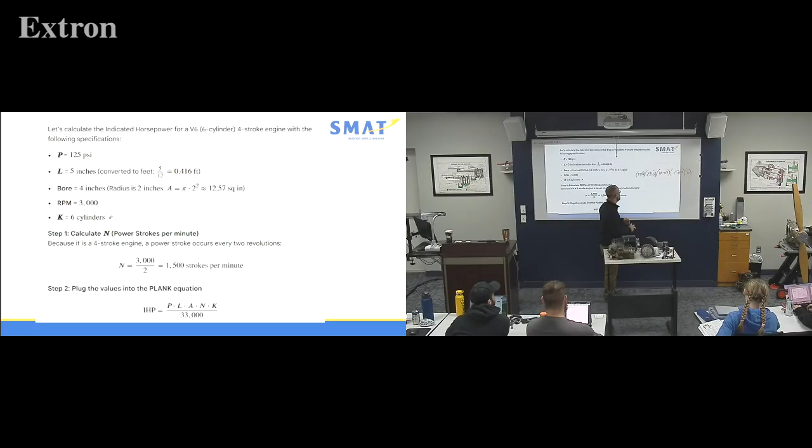Ryan, serious question: do you happen to know when they were measuring how much the horse could do, the 33-pound weight, he or she, could have been either one, the horse. How did they trot it, 1,000 linear feet? Did they go in a circle? The 33-pound weight was just for my mind to understand, because I didn't want to talk about sacks of barley. So it could have been like 100 feet. I was picturing a horse lifting a 33-pound weight 1,000 feet in 1 minute. That's pretty incredible. Giddy up, okay.

All right, can somebody do the math for me? I've done it, but can you do the math for me? 178.265454. What is that, big boss? What is it? IHP, indicated horsepower. All right, 178 horsepower.

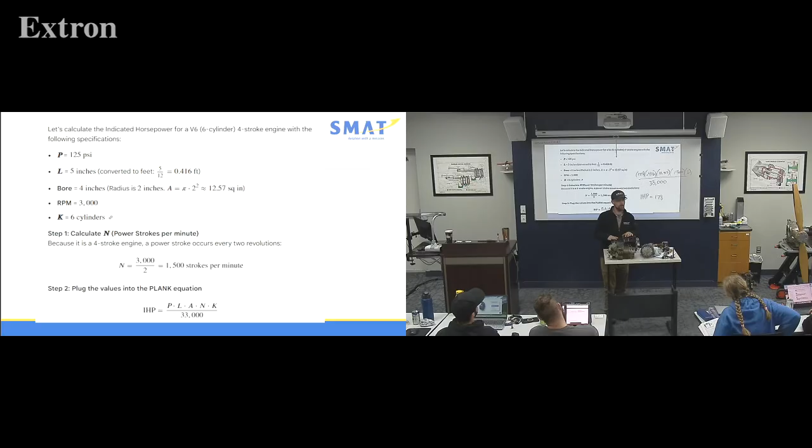Okay, proper timing. And anybody remember the word VE? What is VE? VE... volume. What? Volumetric efficiency. Oh, I know, we heard this. Was that on Monday? Maybe Monday. All right, what was volumetric efficiency? What is volumetric efficiency?

Ability. Go ahead, Marcy. Come on, Joe, add to it then. Volumetric efficiency is the ability of a cylinder to take in, suck, squeeze, bang, and then push it back out. Okay, if a cylinder cannot do that, for example, too weak of a spring.

You guys ever measured spring tension, valve spring tension? Okay, what was the purpose of that besides busy work? It was not busy work. If a spring is not strong enough, it will not close the valve, there's a purpose in it. If it's too low, the valve's going to open too much. If it's too tight, the valve's not going to open enough. What happens if the gap is too much between the push rod and the rocker arm?

If the gap is too much, it won't open enough. What if it's too tight? If it's too tight, the valve may not close, or it may open too long.

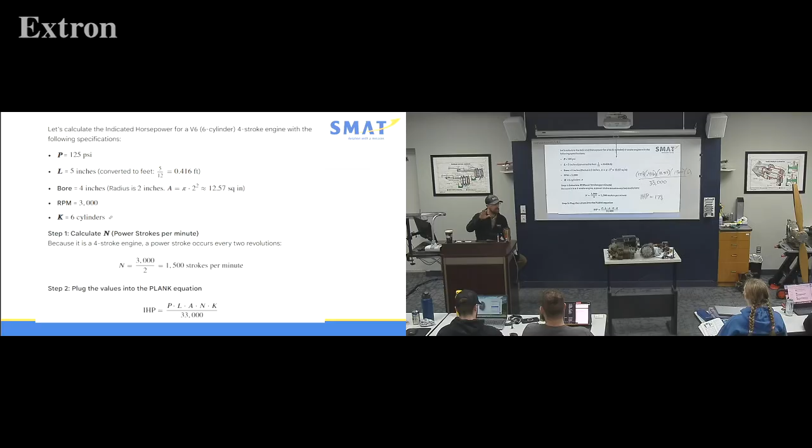All right, everybody good? Any other questions, comments? Hey, you're really real now. Okay.

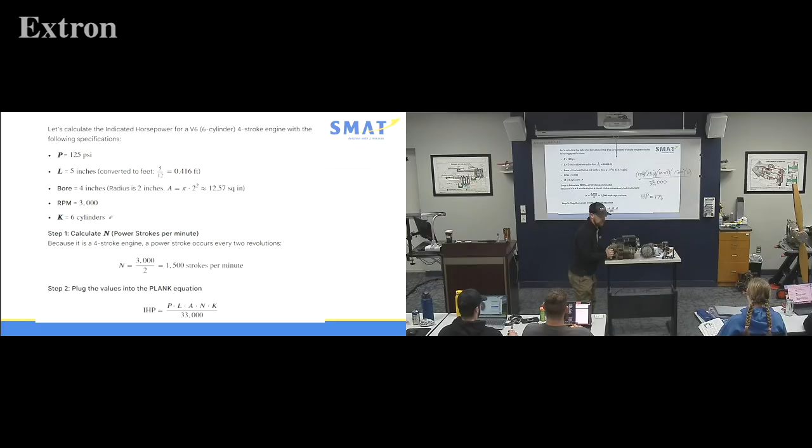Let's take a look at this. I want you to be able to see one of these cylinders. This is an IO360. This is not your friend, this is your foe. But it's a little high maintenance, okay?

So it may be your bread and butter if you're working on Sky Masters or Sky Disasters. They were also on some 172 XPs, some 175s that did not have the GO300s or the IO360s or O360s. This is a Continental 360.

Anybody confused yet? Why did Lycoming and Continental both do 360s? Do you know what the difference between a Lycoming and a Continental 360 is? 2 more cylinders.

Continental 360 has 6 cylinders, but they're little babies. Look at it, look at that, so little. Versus a Lycoming has a 5.1-inch bore. So this one's like right at 4.

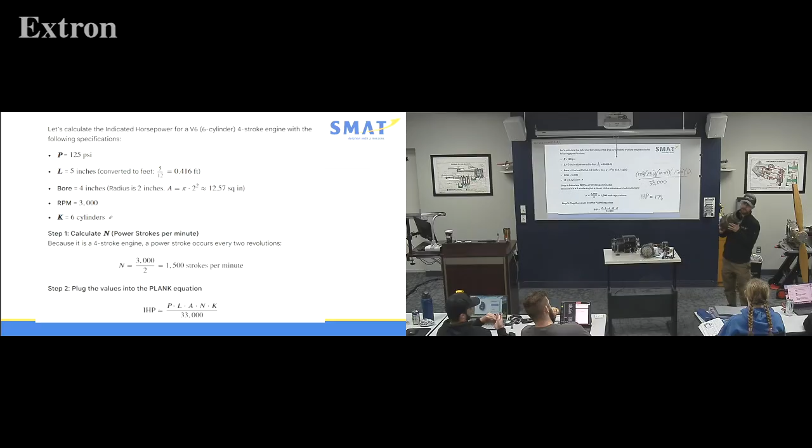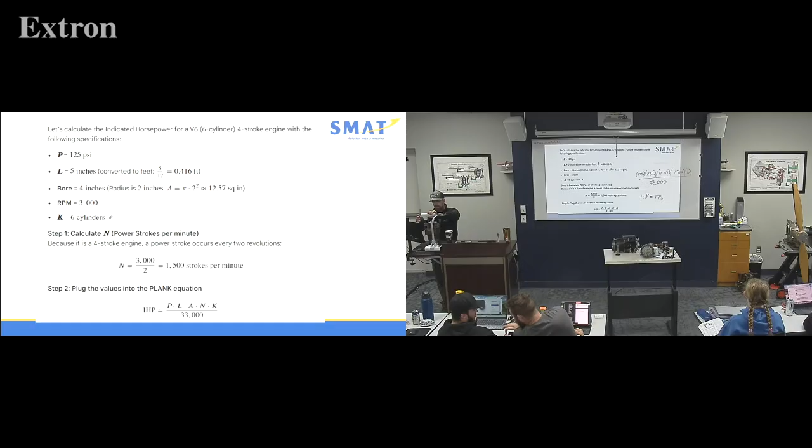So this is a Continental IO360. It is IO360, sorry, I had to do a double take. All right, this is going to be a little bit of your nemesis, so I want to teach you through it, okay? And if it doesn't work, we'll get the man up here, okay?

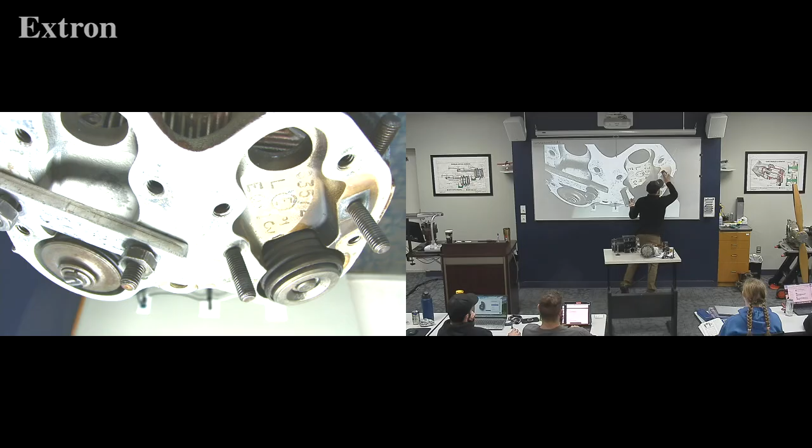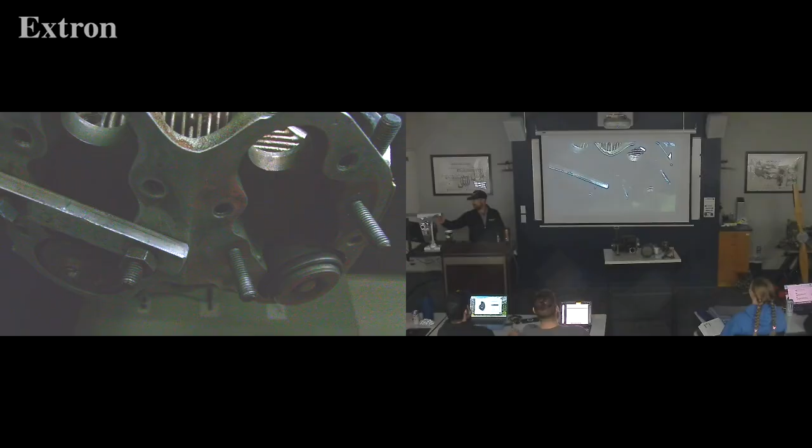Whoa, oh, whoa, all right. If I turn the light off, are you going to go out on me, or are you guys going to hang in here? You going to hang in? Should I put the thing down? Whatever. Okay. Whoa, that's not helpful. Oh, that's horrid. Okay, great.

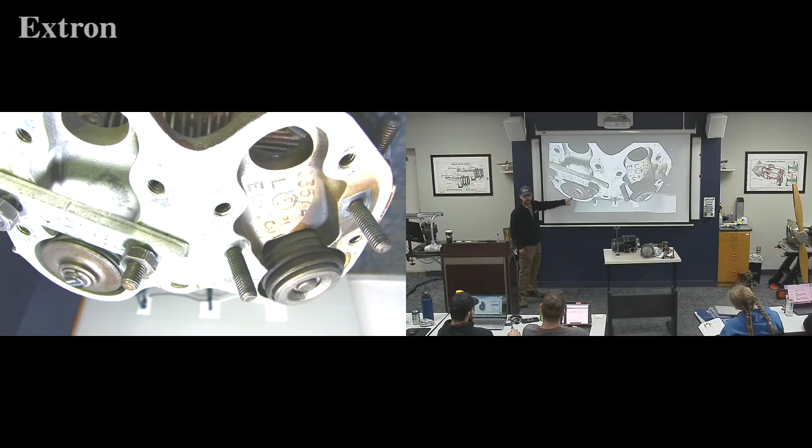I'm trying to get you to see this. Can you see this little line? Can you see the line on the end of the valve? Can you see it? Yes.

Don't move, Ryan, hold what you got. Can you see it now? Right there. What makes a line along the end of the valve stem? The rocker. What about the rocker?

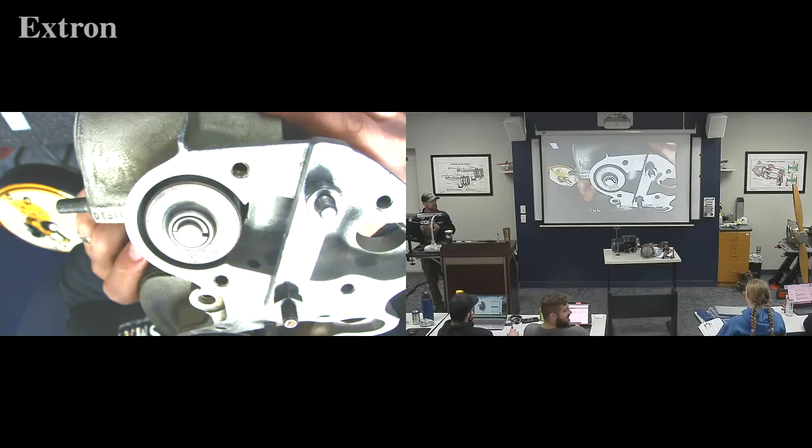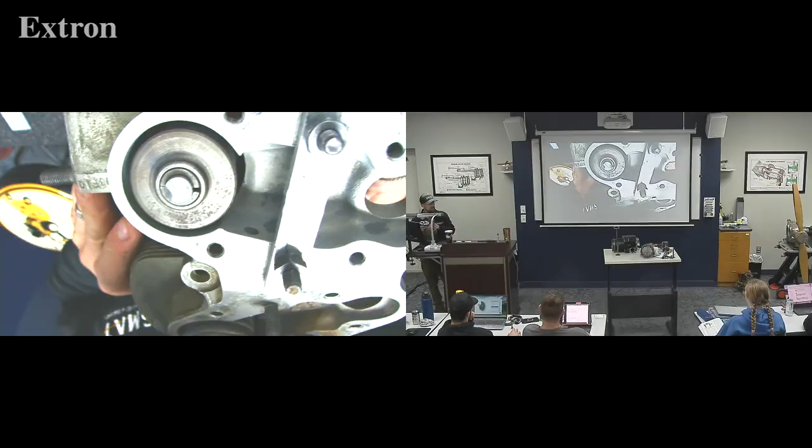If I see this, let's do this, let's ask Israel. Israel's lively this morning. Israel, if I see a flat spot like this on a lifter, what does that tell me as a detective, I mean, aka mechanic? On the face of a lifter, if I have a flat spot on a lifter, or tappet, whatever you want to call it, what does that tell me about the tappet?

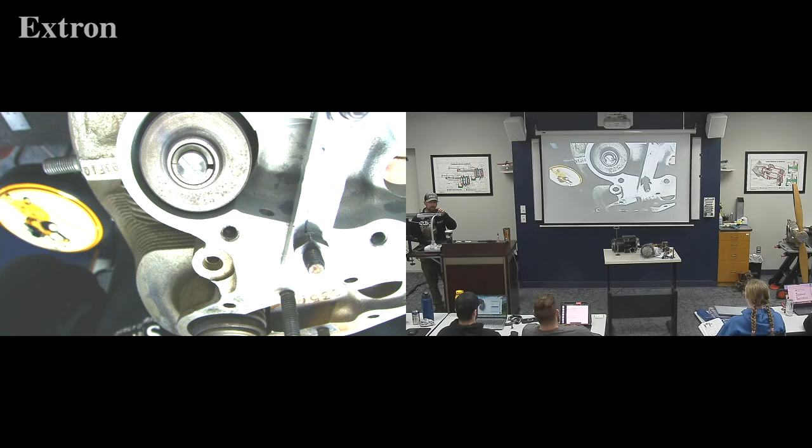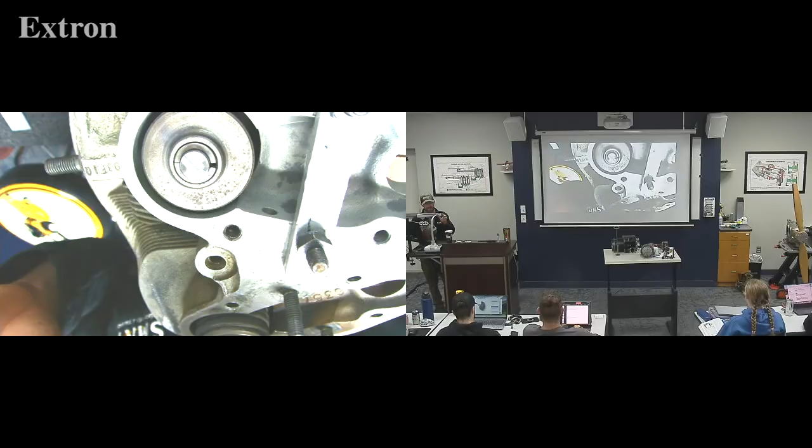Not spinning. Valves, just as lifters, are supposed to sit inside their little cubby hole or bosses and rotate with oil pressure. Valves also are supposed to be rotating. They are. Did you know valves rotate? Not a lot, just a wee bit.

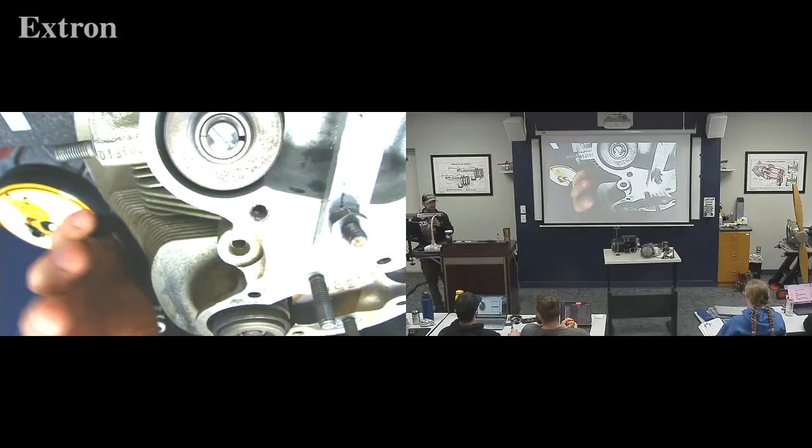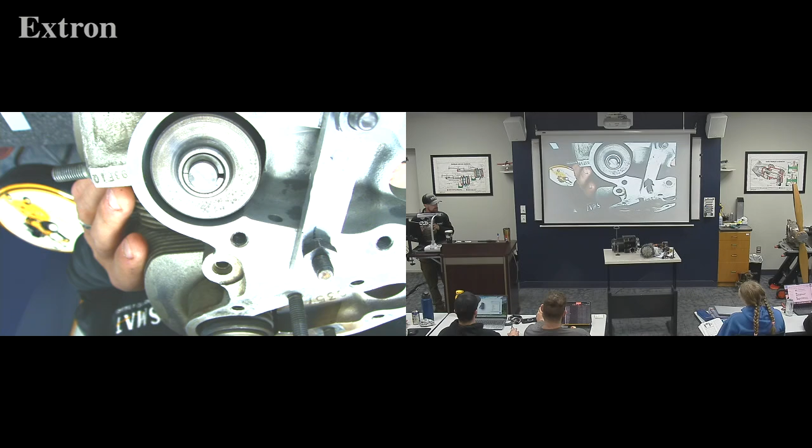Do you think this valve's been rotating? No. If you remove your rocker cover, why do they call it rocker cover? Because it covers the rockers. This one has 2 different rocker covers, and you see this below it, and you see a flat spot on the rocker, what do you know? The valve has ceased to do its job.

It's not rotating, okay? What's the problem, Jedediah, if a valve doesn't rotate within its seat? First think of corrosion or lack of oil. Lack of oil or corrosion, what's going to happen with the valve to the seat?

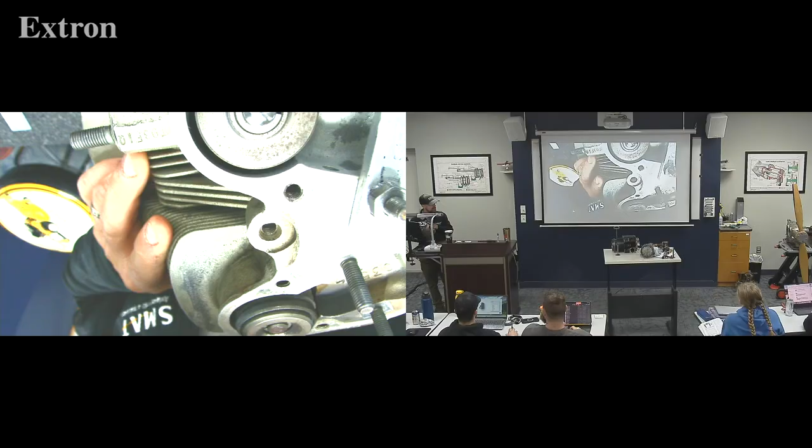Valve to the seat. Let me put it this way: if somebody goes home and lays on the couch all the time, what do you call them? A couch potato.

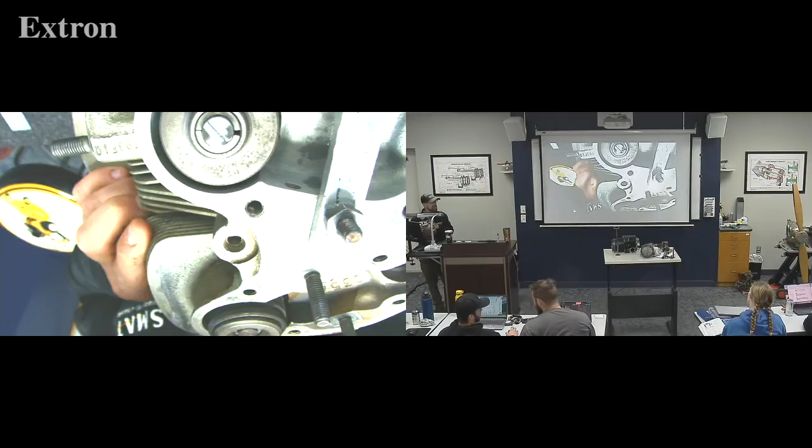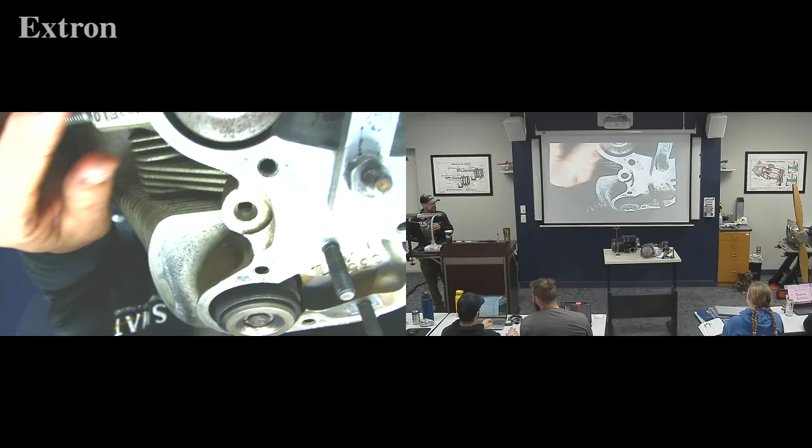If this valve decides to sit in the same spot all the time, it becomes a stuck valve in that spot. It gets in a groove and will not rotate anymore. It actually begins to wear into the seat. It becomes a potato in that spot.

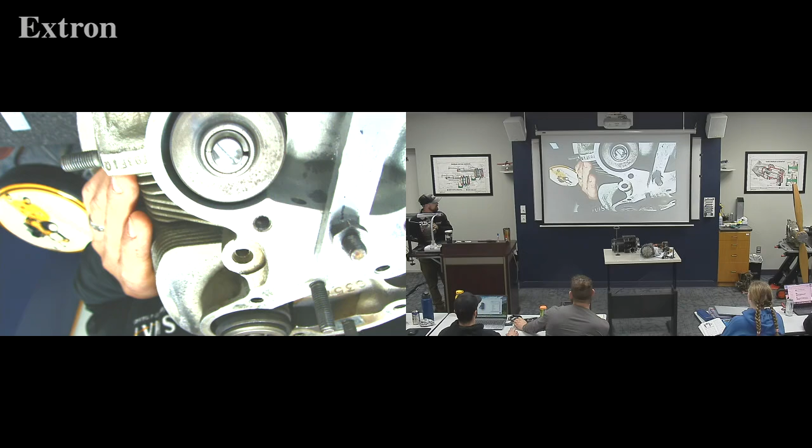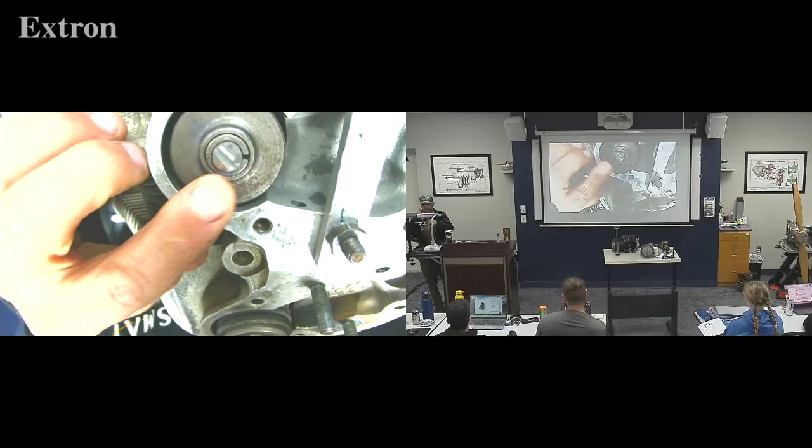So what needs to happen right here? What would need to happen? Okay, so then we're going to reface by grinding the end of this valve.

And you can take this down a little bit. Back to what Grant was talking about—this is all leading back to what Grant said. It's his fault, not mine. So Grant was talking about measurements. In the Continental Manual, it gives you a height of the valve.

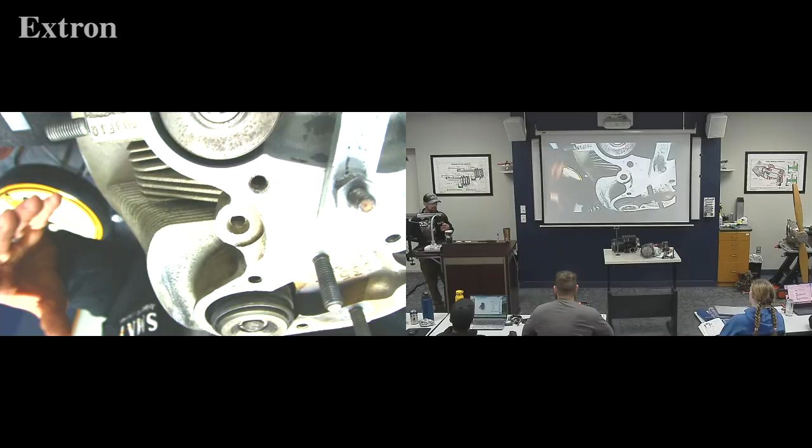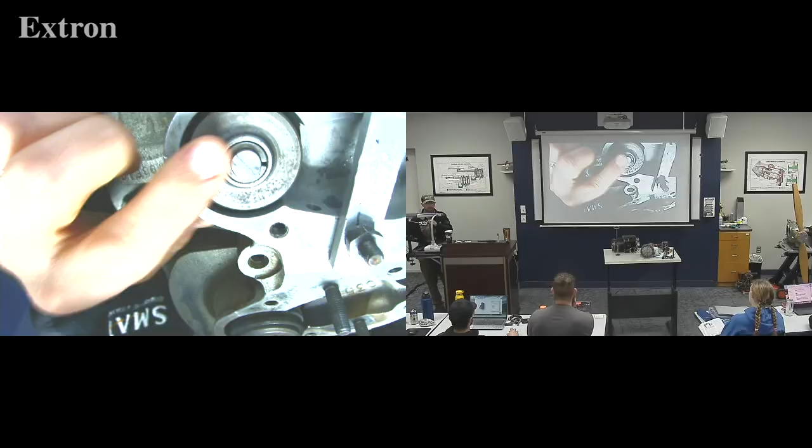Everybody okay? You kind of got what I'm looking at?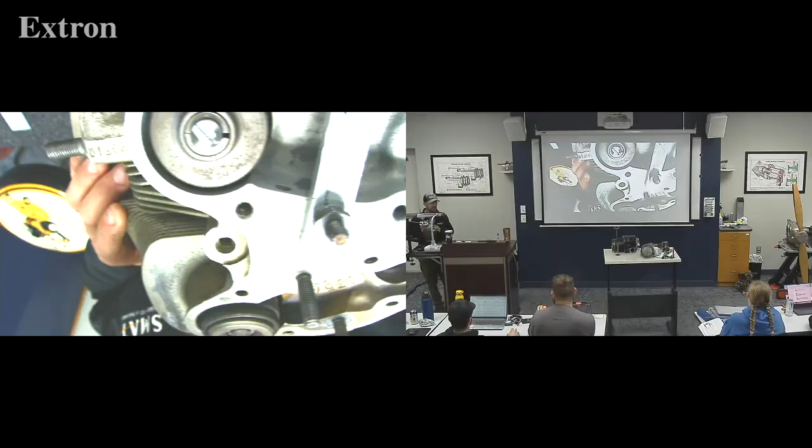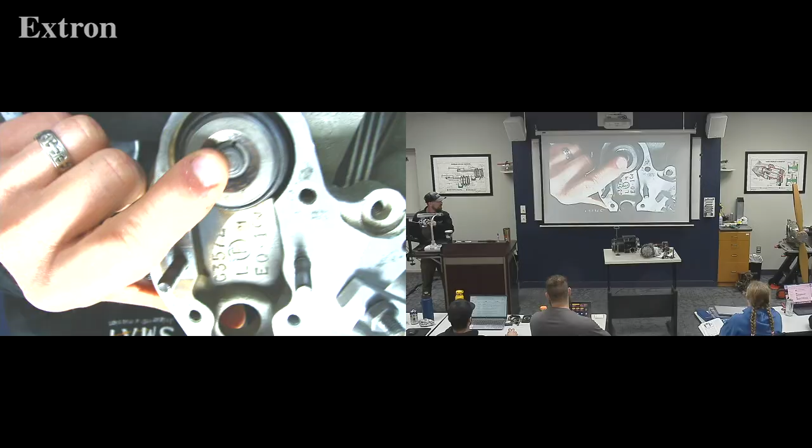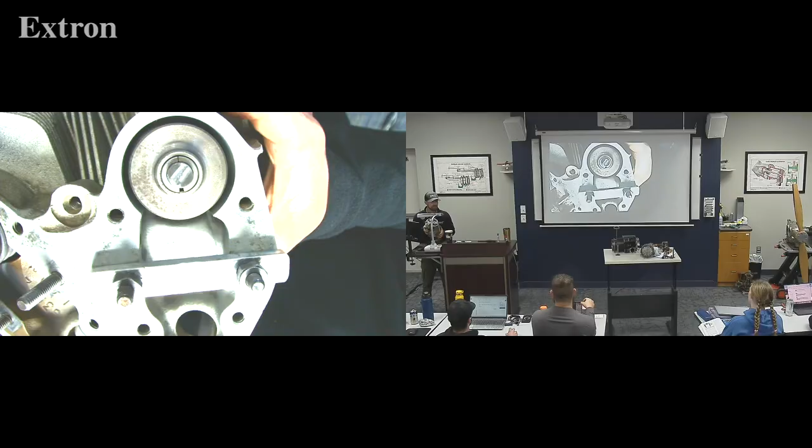Now let me show you a valve that's rotating, since you said now I see a bad one—there's a good one. Do you see the circle on it? How it has a little circle around there, inside on the valve stem? That's a nice little rotation, isn't it? Isn't that cool? There's a bad one—see the bad one now? Can you see what I see? Any questions on what we're looking for when we open up a valve?

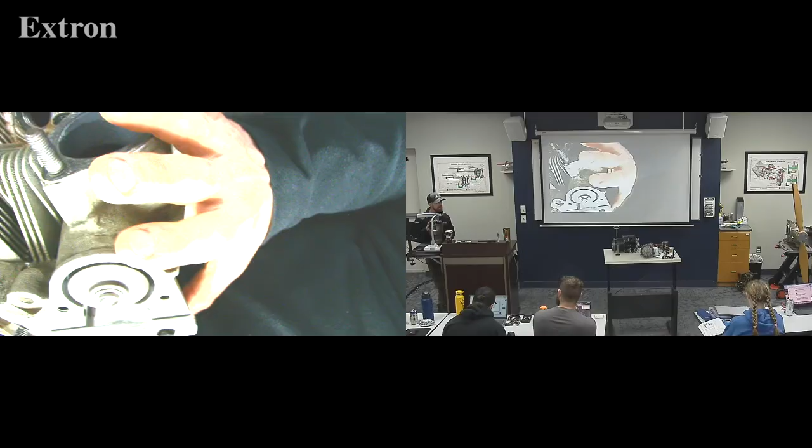If you're driving your car all the time and all of a sudden something feels a little off, you wouldn't say, oh man, I bet the gears all jumped off. You'd say, man, I either have a fuel problem or a spark problem, right? Kind of got what I'm saying?

All right, so I want to teach you—we're going to walk through what I call the 5-minute cylinder inspection, where you're going to get in there and say, what am I looking for here? You're going to look through a single cylinder, 5 minutes, only one, but we'll do it on the mock aircraft like you're trying to figure out what's going on over there. Does it suck, squeeze, bang, blow? You'll be able to find that out pretty quick.

We'll do compression checks, and I'll show you bad compression checks and good compression checks—how to die doing them, and how to live doing them. Nobody's actually going to die doing them, but I will show you, when you take your hand off the propeller, just how violent an aircraft can be. I'm going to let one spin just to give you a respect for what we're doing.

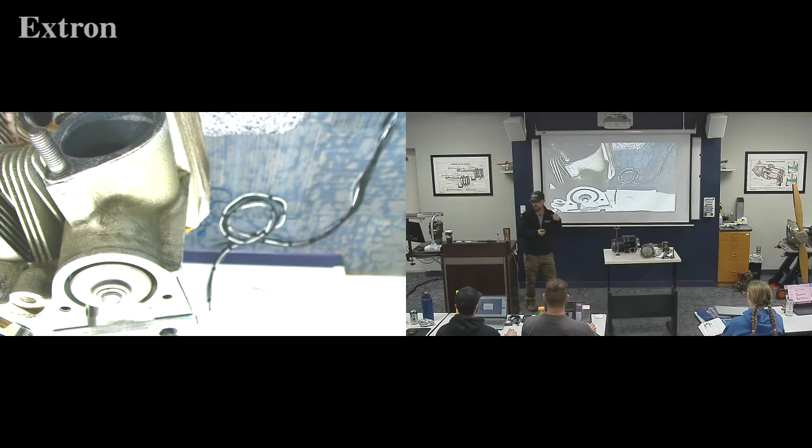All right, the other nemesis on this one—real quick, off the bat, what do you notice different about this cylinder?

You have the intake on top and the exhaust on the bottom. Do you know they do this with twin turbos? They didn't have a place for the intake, so they put the intake on the Cirrus twin turbos on top, because down here is the spinning things on each side with the exhaust, called turbochargers.

So twin turbo 550s and some of the Bonanza B36s, oh yeah, they're B36s. Some of those did the intakes on top, okay? So don't be alarmed, 360 was just one of the first ones to do the intake on top, okay? So some of the 550s did them on top as well.

All right, so this one, you'll have to use a rod. It doesn't come with it, but you can get a rod like this. I usually use aluminum, just an aluminum plate across here. It even says 360 on it, just for you. Okay, there it is, so nice. Just a piece of aluminum. Shove it on there, it doesn't have to be super tight, because the rockers connect slightly differently on this style.

Okay, then you take this bad boy, you go under here just like you did on the other ones, and you're going to break it loose. And then you'll pull them out like this. Please, please do not dent it. If you get off center, it will dent when they're recessed valve springs like this. You could dent the housing. It's very thin, okay. Everybody okay?

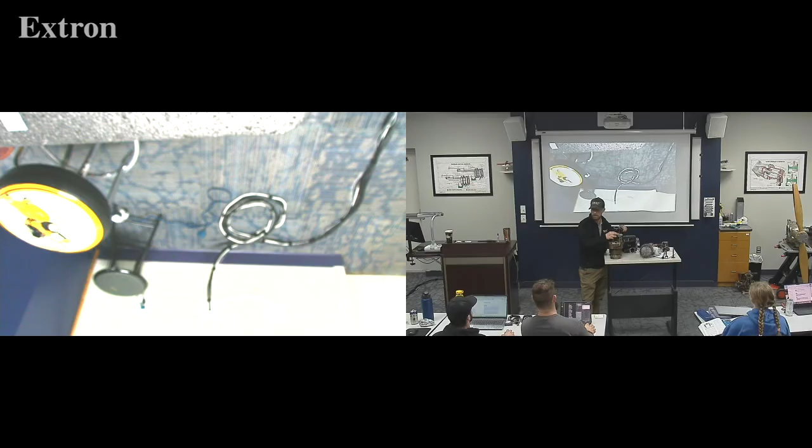Any questions with that? And then you pop the keepers out.

Everybody was safe yesterday, I felt like we did a really good job. Some of them were pretty stuck. I get that, some of them you have to fight. Okay, if you're wondering why, wow, this is so easy, just be thankful, because some of your classmates didn't have it so easy. Some of them had it pretty difficult.

All right, any questions? Everybody good on what we're doing so far with our valves? All right, I'm trying to get you out of here, so I need you to hang on, okay? All right, let's look at these two valves real quick. These are two valves that I have for you.

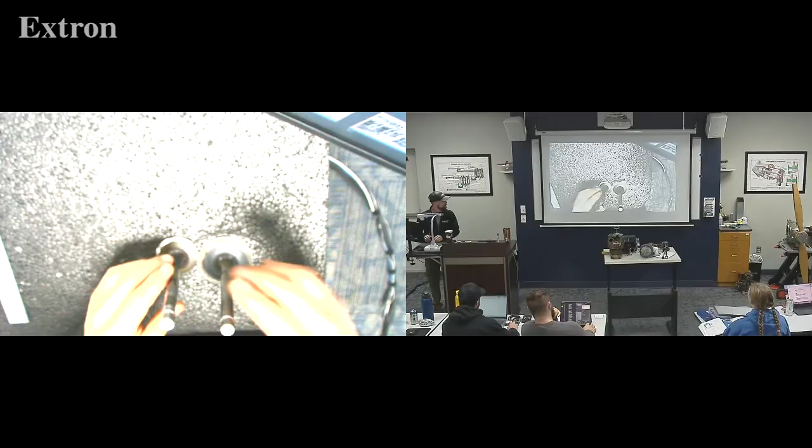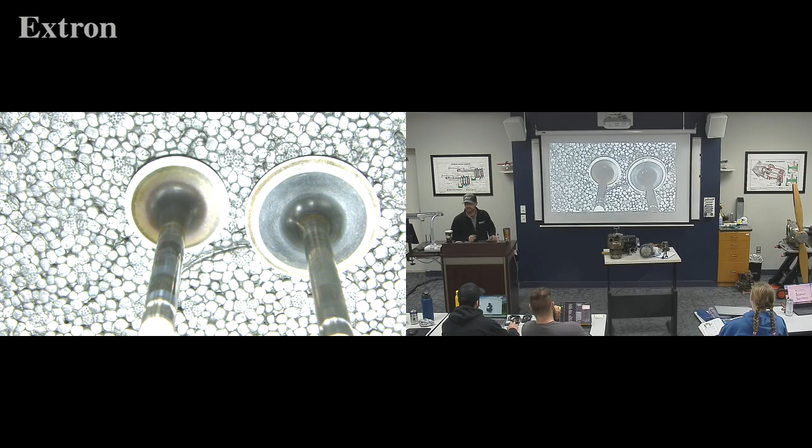Okay, so I fill the cylinder full of mineral spirits, and I hold it upside down, and it leaks just a little bit. Bummer. Okay, so then I want to reface the valve.

This has been a valve that's been refaced. What do you notice? It's super shiny and pretty. It's shiny, okay, but it also has a little edge here. Okay, if I don't have the edge and it gets to razor thin, see how that one's got an edge to it? See the little black edge on it? If the silver comes all the way to the end, what do I know about that valve?

It is too worn out, okay? It needs to go away. This one as well has an edge distance. Once we cut a new face, which does not happen often, okay? It doesn't happen often, but sometimes we have to cut a new face if you have the machine.

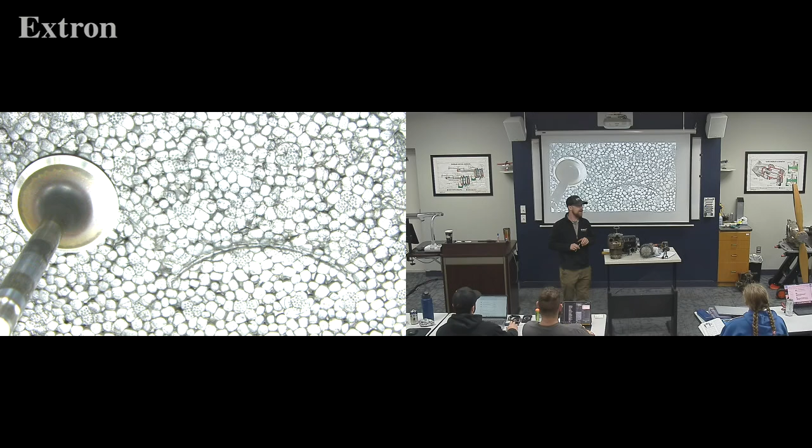Say Shane buys a set of cylinders for a customer. Customer says, I want all 6 new cylinders. One thing is, that customer has a lot of money, okay, so they want to drop 12 grand on a set of cylinders. When Shane gets those cylinders, if he buys Superior Air Parts cylinders, they're going to have brand spanking new valves in the cylinder. They're going to be shiny. They're not going to have any black on it. It's going to look super shiny.

Okay, before he just sends it, what he's going to do is what we call lapping the valve. Okay, or if you have a valve that is leaking a little bit, we're going to do something we call lapping a valve. So you're going to take the valve. There's my valve, that's actually a pretty decent valve. It even says intake, it says Superior Air Parts. This is not a Continental, this is an aftermarket, FAA PMA approved, if you want me to put it generally, okay?

You're going to take some toothpaste here called lapping compound. By the way, all of my students who have gone to work for United, did you know their very first day they get lapping compound on the job? Did you know that? Valve grinding compound? Now, last I checked, turbines didn't have any valves.

They used them for their screwdrivers. They put them on the end of their screwdriver so that they can grip the screws so they don't strip them out.

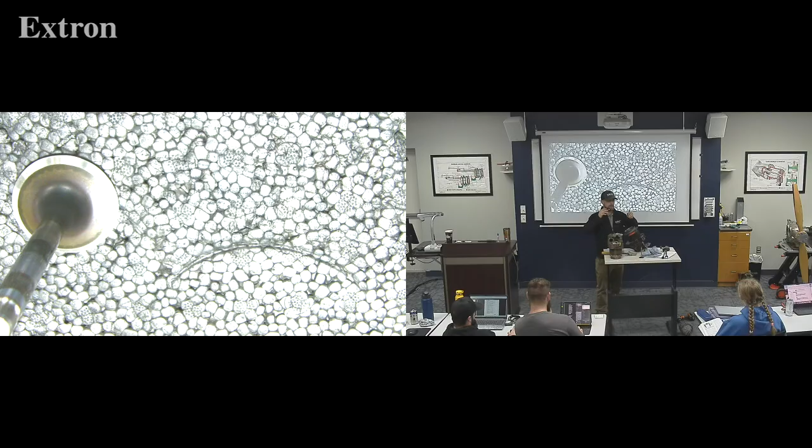Okay, so you take a little toothpaste called valve lapping compound. Now, this is common. Grinding it is not common. I will show you in groups of 5 or 6 today how to grind, but that's not common. Everybody good? So then we're going to take a valve.

You're gonna say, you know what, it didn't seal. When we filled it with mineral spirits, it did not seal. I'm not happy. So this one's nice and shiny. You're gonna take a little toothpaste here, and you're gonna put just a little bit on it, just along the edge here.

This is water-based. I had oil-based paste, and it's way better, way faster than this water-based. But today, we're using water-based. It's eco-friendly.

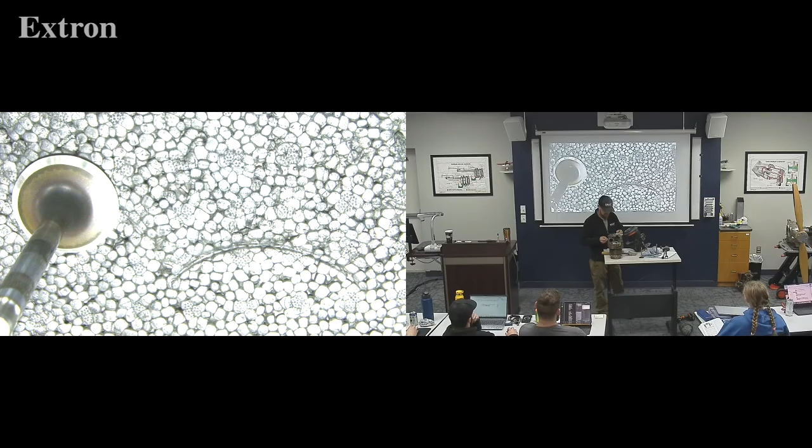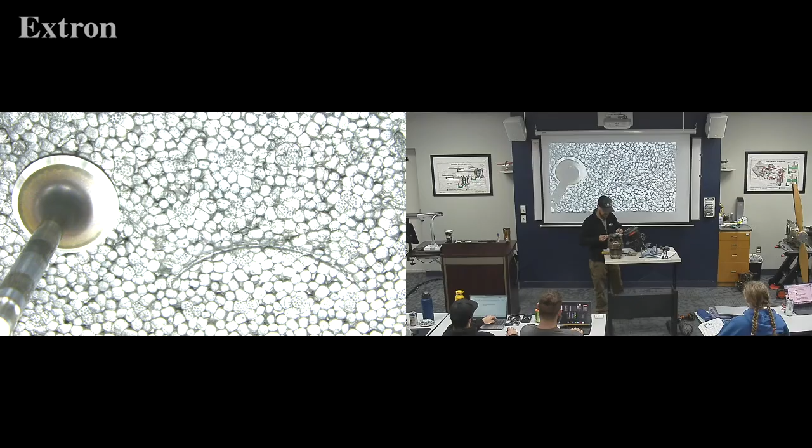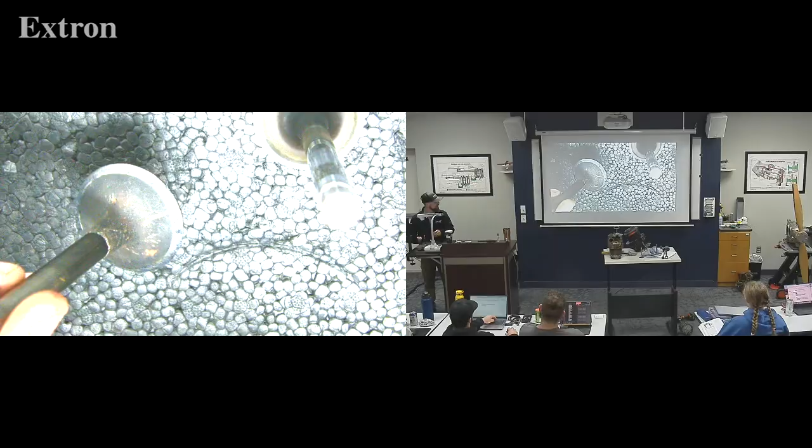Okay, I'll show you before I put it in there. This is what it looks like on there. So here's the same valve. Do you see how I have a thin coating on there? And it's got a grit to it. Do you see the grit on it versus the way that one looks? See the difference? All right, so now we're going to take this and we're going to shove it in our exhaust side.

Without touching it, hopefully. You don't want to rub that all over the cylinder. It's kind of a bummer.

Okay, then we have our lapping tool here. So this rotates back and forth like this, and then every, I don't know, I guess you can count it, it's like every 8 clicks, it rotates it 40 degrees. And then 40 degrees, and 40 degrees. So it's actually rotating the valve in there as it's hammering.

But you just do it fast, because it sounds cooler when you do it fast. Okay.

Try to get it nice and stuck on there. If it doesn't stick, you can use a little Vaseline.

Well, you stinking valve. Come on.

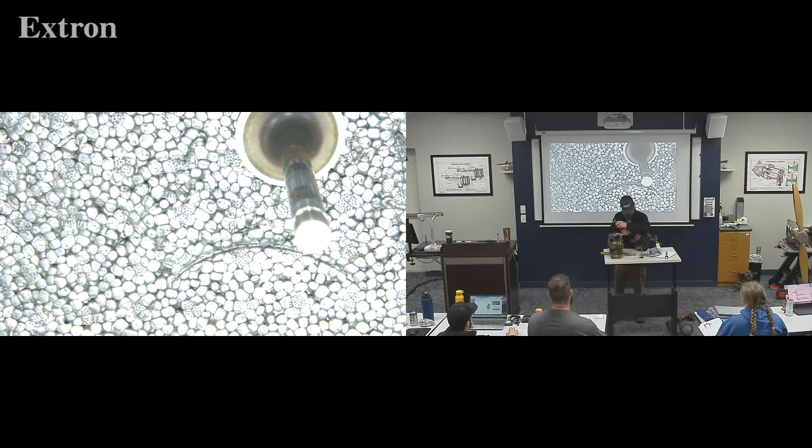Come on. There we go. Okay.

So once you do it, you got to do it quite a bit, and then keep rotating it every 40 degrees or so, 45 degrees. Rotate.

No, you can't use a drill on the end of the stem, Jimmy.

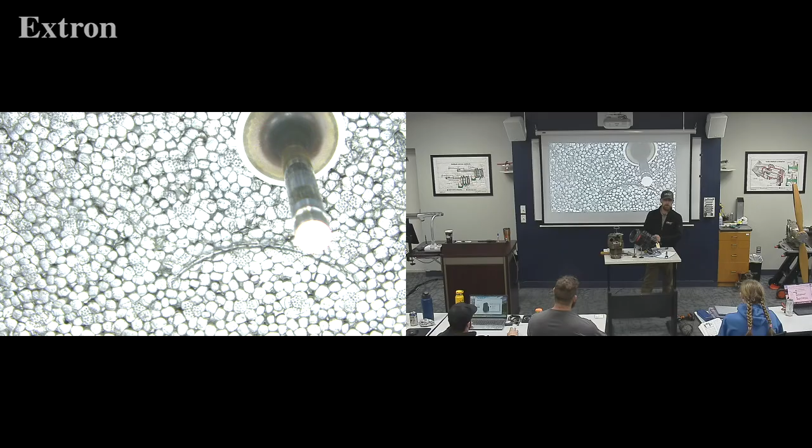Okay, I have had to use a fuel hose on the end down here and then put a clamp on it, and you can rotate it back and forth like that. I like to put a little pressure because our valves are so big compared to like a car.

Back here. You hear how smooth it's getting?

All right, let me see if I can show you what it looks like now. Are you rotating it just like that one, like you spin a little bit and rotate it a little bit? Oh yeah, yep, just the same thing. You want to do that even if you're doing a lawnmower. You have to do valves on a lawnmower.

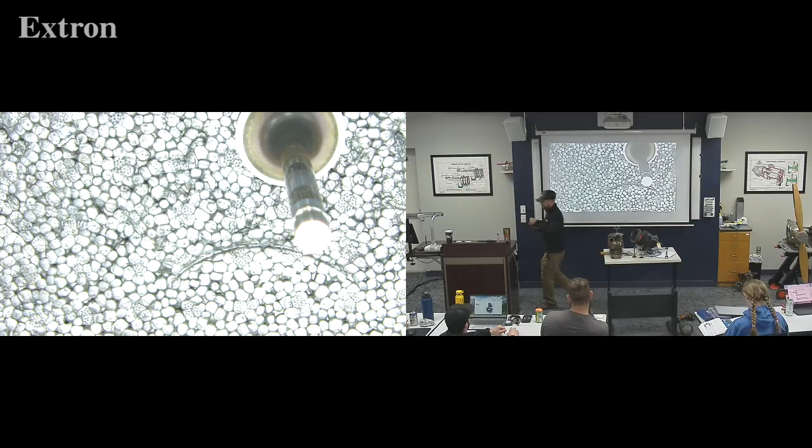Same thing. Okay, so let me see if I can show you, and this is super important. This one's not wearing correctly, which is what I kind of was hoping would happen. All right, so cleaned up, you're going to see dark.

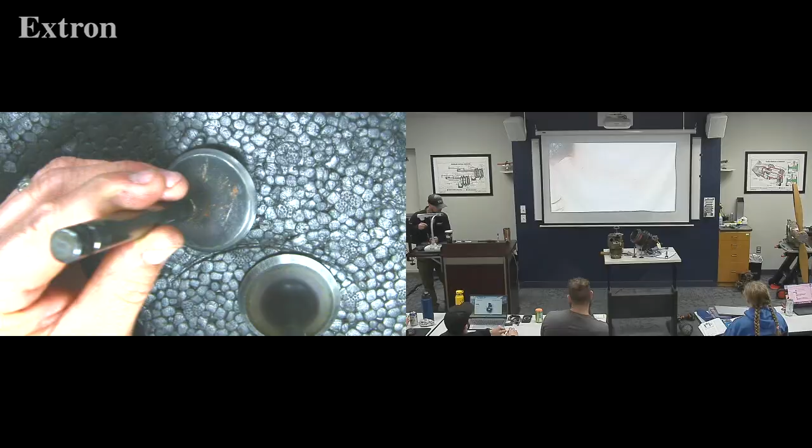Wait, you can't see what I see. Sorry. Do you see darker and then lighter? So let me see if I can do this. Here we go. So this is real shiny here, and then all of a sudden we're starting to get a shadow. Do you see where the shadow ends right here?

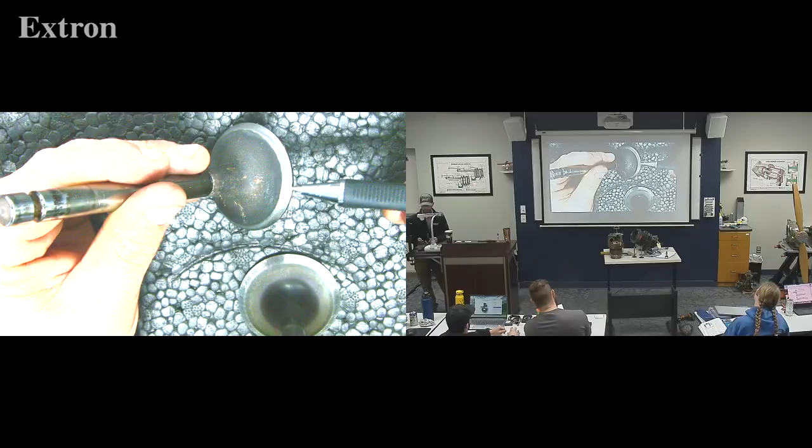Yeah. Here, let's see on this side. Here's a good one. So it's shiny right here, and then all of a sudden we got a shadow. The shadow is what I want to see, but I want to see it all the way around. Okay? All the way around. It should look like this one.

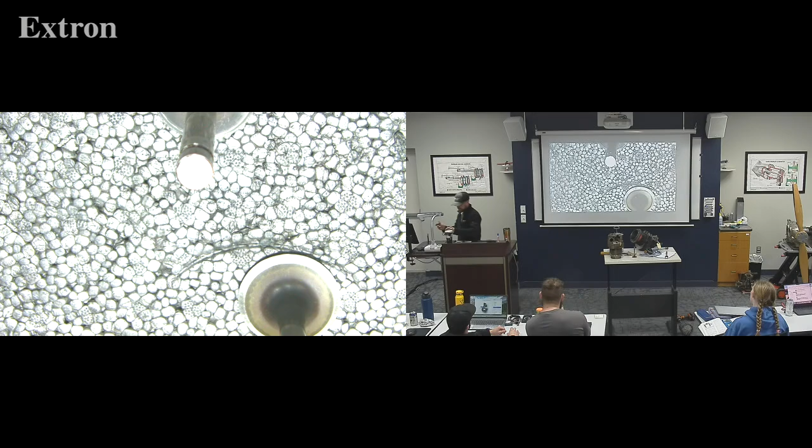When we're done, that lapping should go all the way perfectly all the way around and have an edge distance right here. So the valve's not going too deep. So once you start lapping and we get shiny spots or uneven shadow, like this right here.

Do you see where it stops right here? I can pass this around to help you. Okay, you should have a shadow all the way around. But see, there's no shadow right here. Okay, so what does that tell me about the valve and the seat?

Come on, what is the logic here? It's not matching. So is that valve going to spin when it's back on the engine? No, it's got a low spot. It's not even touching right here. Is it actually going to seal?

So what do we do? We lap it again. And if it still doesn't go, then you may have to go back to a grind. Does that make sense? So today we're going to grind them, then lap them, and then test them to see if they leak.

Once they're done, you've got this little line that's pretty consistent. Two things I'm looking for on the consistency: the width of the shadow, and that it's in the same spot all the way around. If I saw the shadow was all the way at the corner here, or if the shadow was all the way at the end on one side but even all the way around the rest, what do I know about the seat? If this shadow comes all the way to the end, but the rest of it looks even, what do I know about the valve seat?

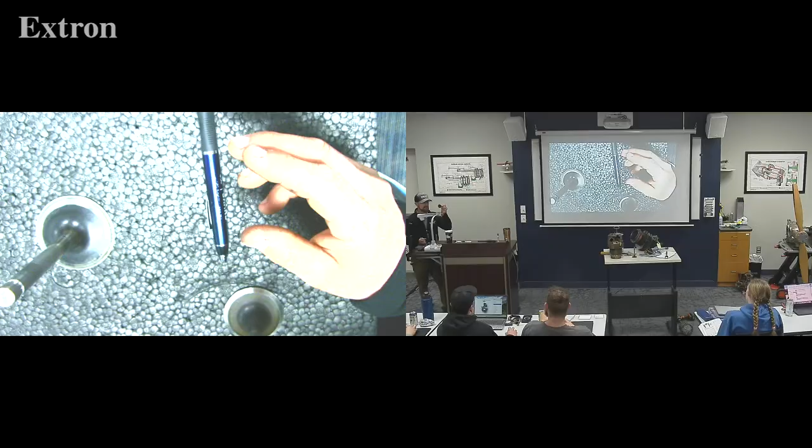Because what does the valve do? The valve opens like this, nice and smooth. So what you're going to do is get the engine very, very hot with the valve seated, turn the engine off, open the rocker cover, pull the rocker off, turn the prop until the piston's all the way down in the cylinder, and hit it — wham! — with a brass punch. It'll open and close very fast and knock all the deposits off.

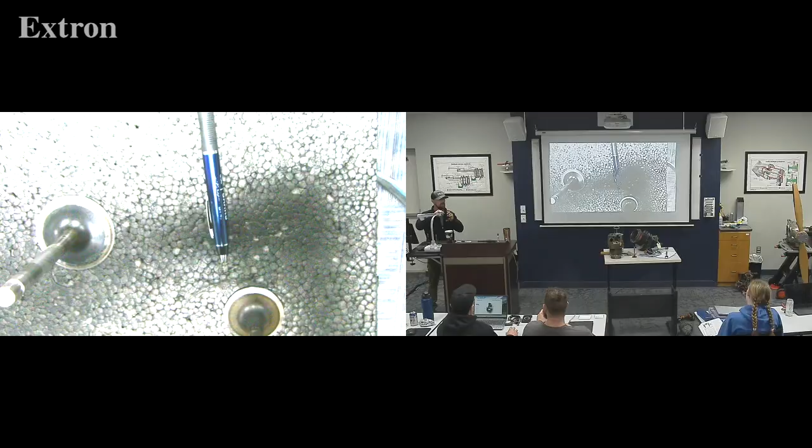Then you do another compression check, and if it's sealed, you've just beaten that valve into submission. Congratulations, it's called staking a valve. A lot of A&P schools don't teach it, but I teach it very widely, and I've seen amazing results, saving customers thousands of dollars by spending $150 to pay me to go beat on a valve. It's relaxing, it's enjoyable, and it saves the cylinder.

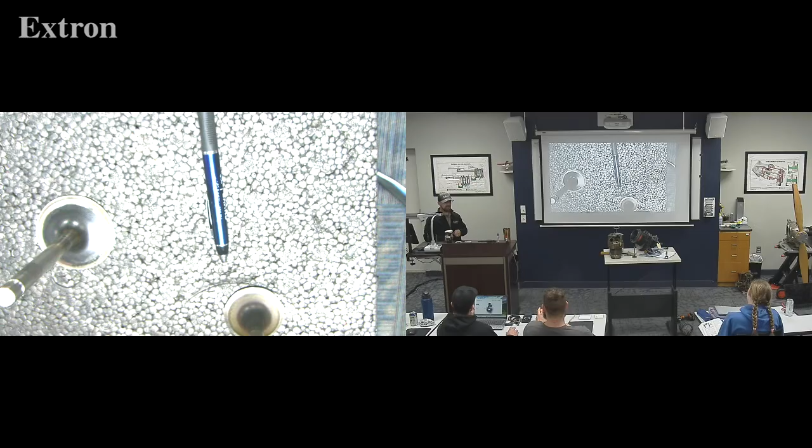So then the deposits are just in the cylinder now? No, they actually go usually into the exhaust, because when you close it... well, it may go into it, but — you're talking about lead deposits? Yeah, or oil deposits. They'll usually break off into the exhaust pipe when they close. You can hear it if you listen closely.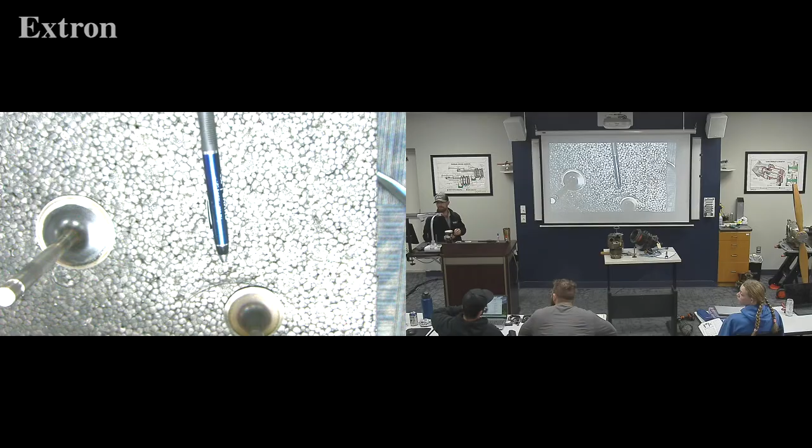You said that the valve spins over time — the oil rotates it. You said to check the oil pressure — where is the oil being contacted? Well, the oil is right here, but you have oil that's going on your valve springs, right here. Oh, I have a cylinder — why don't we look at that?

You have oil up in here. We don't want oil on this side, but we do have oil up here. This is the rocker sealing that way. Yes, or we have rocker shaft seals. Or valve guide seals. Valve guide seals, valve stem seals. Valve stem seals, yep.

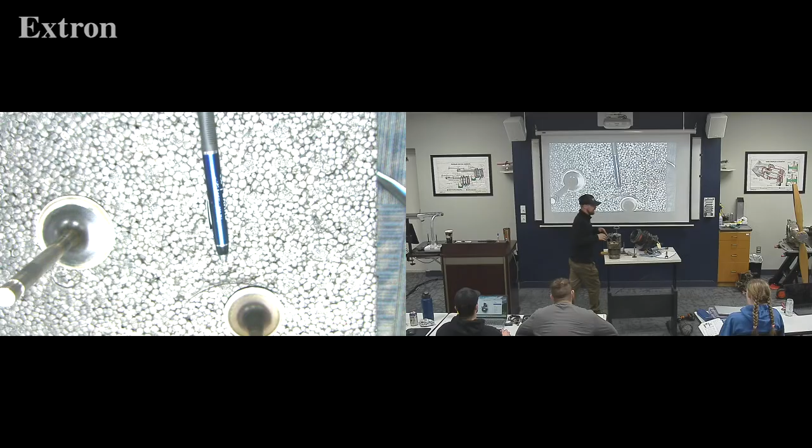Any other questions, comments? All right, last thing before I kick you out of here. Everybody ready? I have heard very different phrases on these. When your valves are out, you can do this with the valves in.

When you're done with your lapping compound, take some mineral spirits or whatever and get all of that out of the cylinder. If lapping compound goes down in the valve guide, what's logically going to happen to the valve? It's going to grind in a matter of a few days, right in here. So what do I need to do? I normally will get them super clean with mineral spirits, and if I cannot be sure of that, I use these giant Q-tips to get in there and clean it out until it's spotless.

Once the valves are set to go, now we're going to do a crosshatch. I'm going to tell you the proper method to do crosshatching. Crosshatching, what is crosshatching? I've talked about it three times now. It's making X's, it's drawing pictures inside the cylinder. Crosshatch gives the piston rings something to grab onto, or actually push oil into, because we need an oil film.

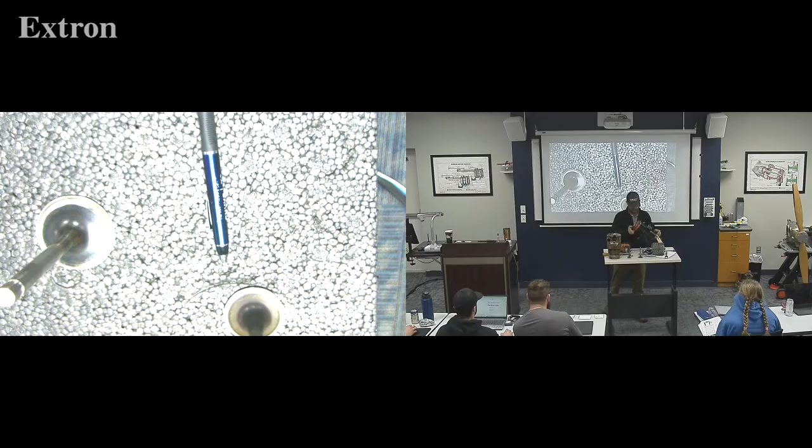This is an aluminum one that was a donor, it gave up its life for us. It's because it had chrome on chrome.

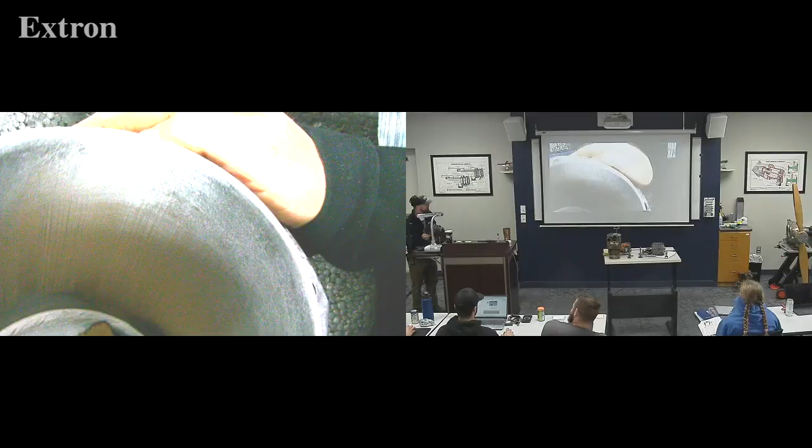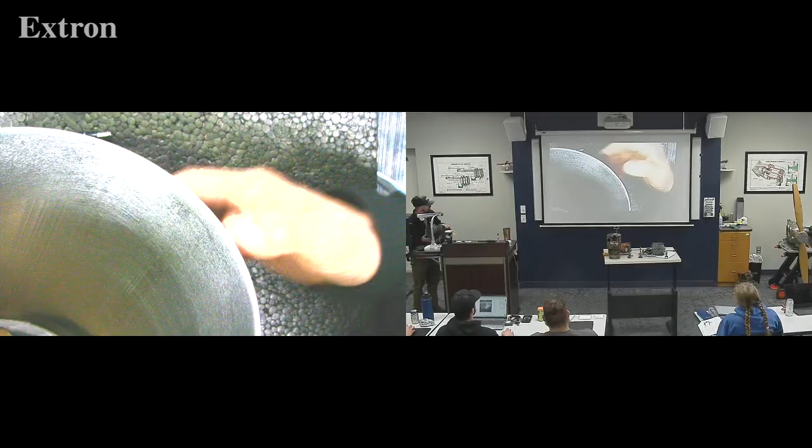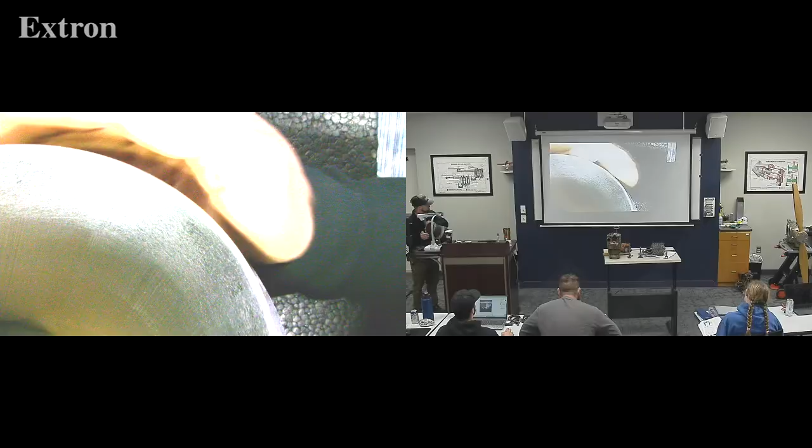Okay, can you see? Forget the vertical lines, okay. Obviously this cylinder is trash anyway, but let's see if you can see my crosshatch. Can you see my crosshatch lines? Oh yeah, you can, right there, by my thumb right here. You see the lines going like that? That's about a 45 there.

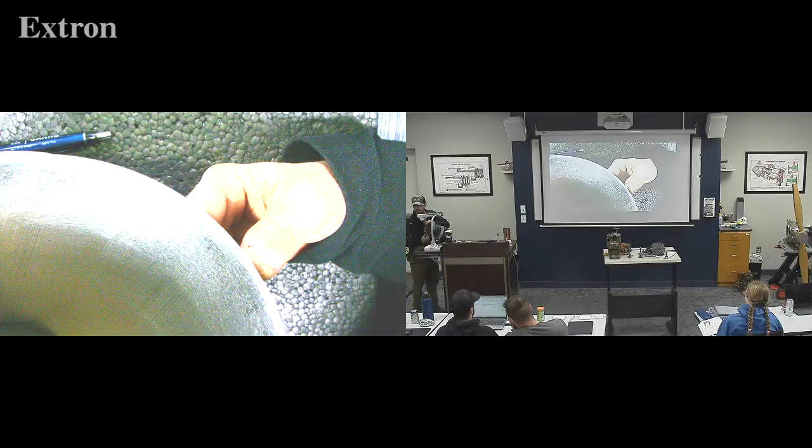Okay, this would be 90 degrees, and then somewhere between 90 degrees, that's about a 45 there. Do you see the scratches? Okay, yes sir. It was pretty difficult to get this nailed because what you're trying to do is every rotation you're either going in or out.

And you want to keep it moving till you get all the way out of the cylinder, correct? Especially with a drill like that. Is there any better tool we could use? Yes, I actually have a hone drill that is air powered, but I don't have air in here, so I'll give you that one. It's very, very slow, it's made just for this. It's like a drill on steroids.

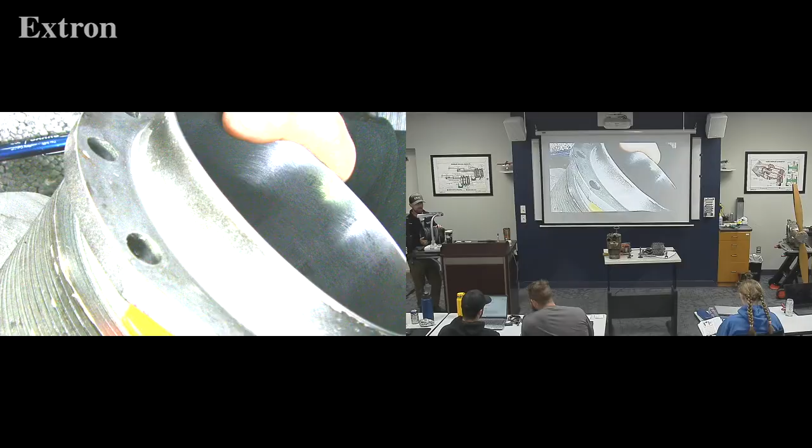It's huge, but it's got a lot of torque, and it's super slow, even if you pull the trigger all the way in. How much mineral spirits do you use? Quite a bit. Dousing it? Quite a bit, yep. I've seen machine shops, they use mineral spirits or they use cutting oil, okay, and we'll use the same cutting oil when we grind valves momentarily. I've used a splash of ATF in the past. Okay, is that sure. I'm just telling you what I think, the book even says mineral spirits, so whatever. All right, Stoddard solvent, okay.

Everybody else good? I'm trying to let you go, yes? Best place for this is in... no, yeah, well you're gonna have to have, we have that little one over there, if you wanna use the little one to be able to run the flex hone in there.

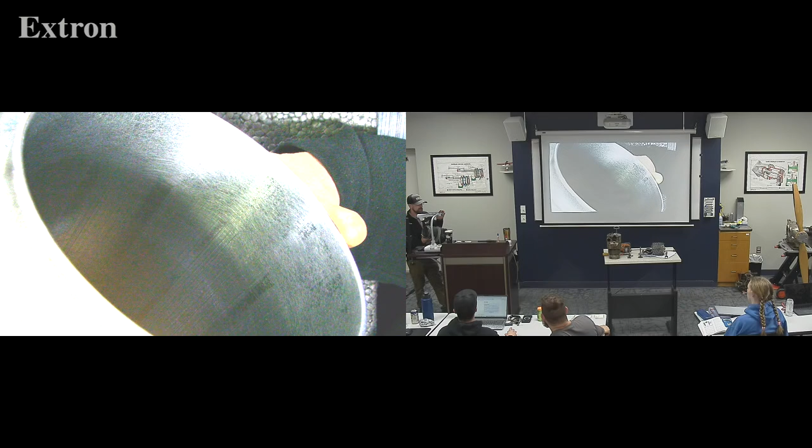So what you're going to do today, we're gonna remove your valves. If you put them back in, good, that's great, perfect. We're gonna grind valves, if your valves are good we may grind some scraps, but the goal is then you're gonna, after we grind them, you're gonna lap valves, and then we're going to seal them. If there begins to get a real long line, then you can go ahead and lap your valves while some are honing their cylinders, okay? So some will hone, some will lap, and some will grind.

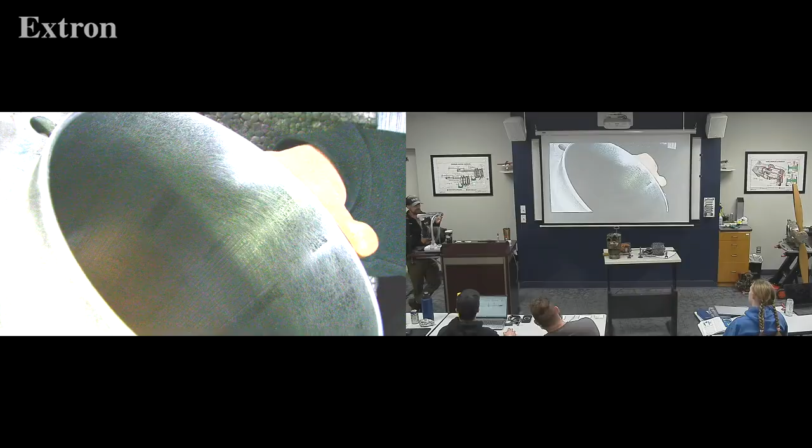If your valves are super good, not worn at all, you can go ahead and lap them and I'll have you grind different valves. Okay, I have lots of donor valves, lots and lots of donor valves. But if your valves are pretty worn or you can't get them to seal, then we'll go ahead and grind those valves as well.

All right, what we'll do first is I will take all of you on the back row and I'll show you how to grind valves first. Then the second group, that's everyone down the middle row. And third group, save the best for last, then I'll call you guys, okay?

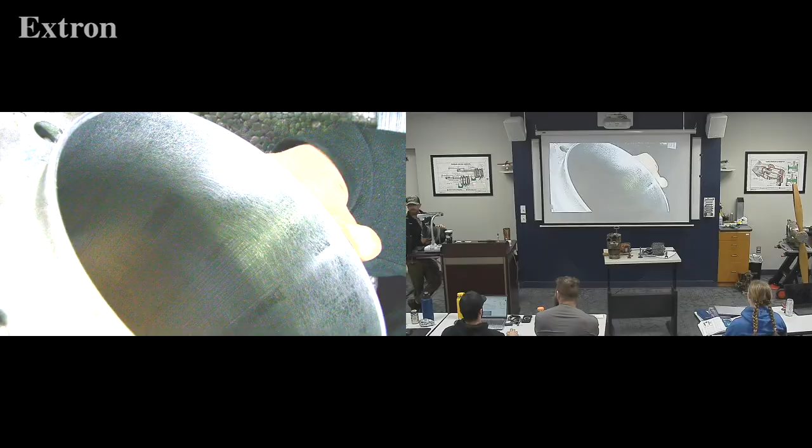How long do you typically? Maybe 7 or 8 minutes, max, because I'm just gonna show you how to grind it and then you can do it yourself, okay? All right, I won't sit there and watch every one of you grind a valve, or I won't get as much done as I did yesterday. Nothing. Okay.

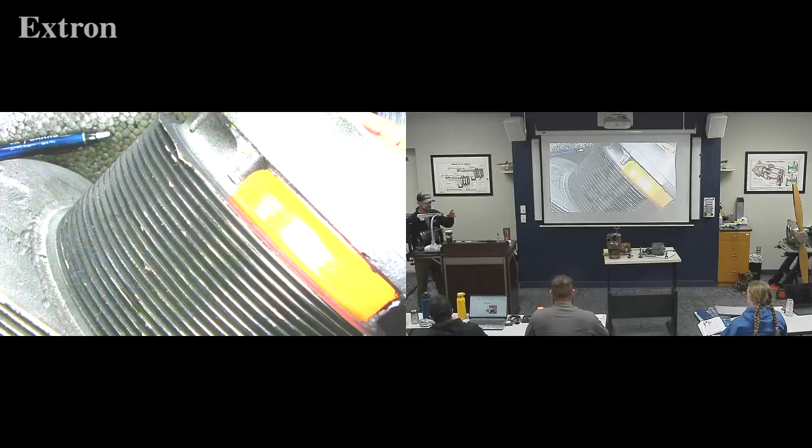Any questions on honing? All right, we have one ball hone for the large bore and one ball hone for the small bore, so you can't all do it at the same time. There's one tank, that means one person should be on. Okay? Everybody good? Go and enjoy.

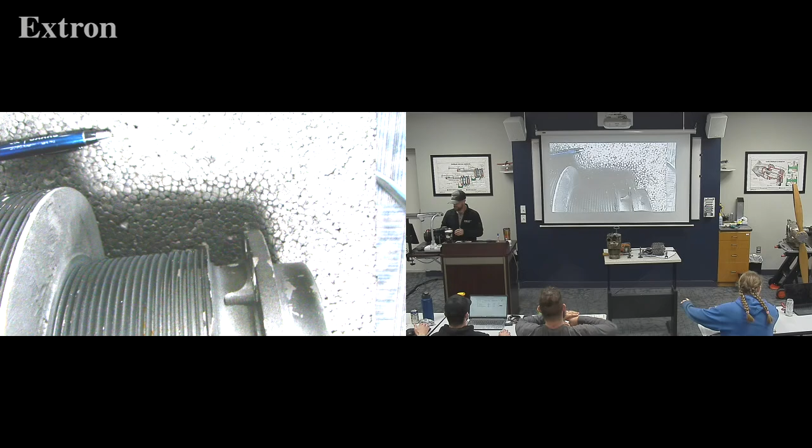Hey, the reassembly and disassembly lab should be done and coincides with what we're doing, okay?